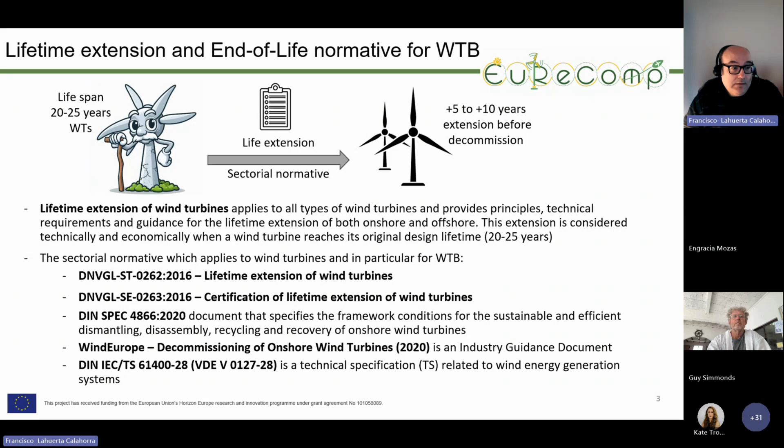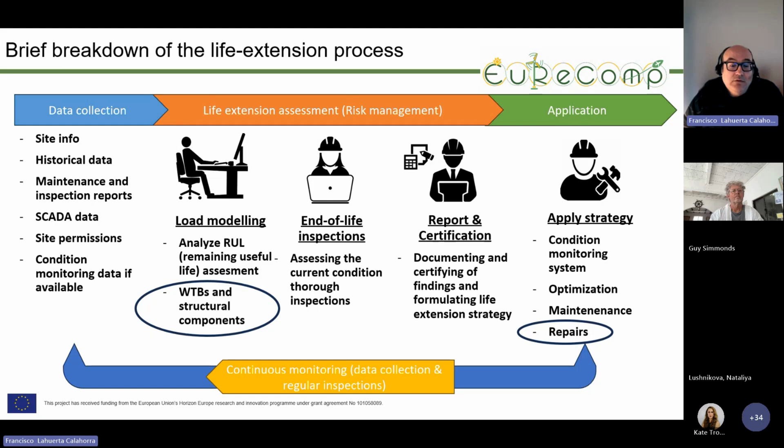Okay, we will continue. Moreover, the report and the certification are required, documenting and certifying all these findings and implementations applied to the condition monitoring techniques, the optimization of the fleet of wind turbines, the maintenance, and the necessary repairs that might be needed. When wind turbine blade life is extended, closing the loop requires continuous monitoring and data collection to assess the ongoing process and verify all this data. In the project, we have only focused on the repair parts and on assessing the structural component of the wind turbine blade by analyzing the residual useful life, which is work that is ongoing at this moment.

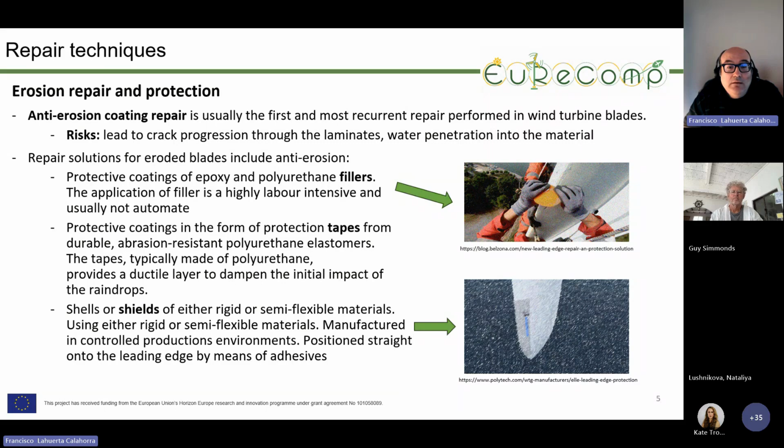In relation with the repair techniques shown in this slide, there are repair techniques related with the protection and erosion of the wind turbine blades. These repair techniques are related with the use of filler or coating tapes outboard of the wind turbine blade, where the highest speed of the wind turbine can be found. Moreover, wind turbine blades might be equipped with metallic shields or shields manufactured of composite materials outboard at the tip, where you might find the highest tip speeds.

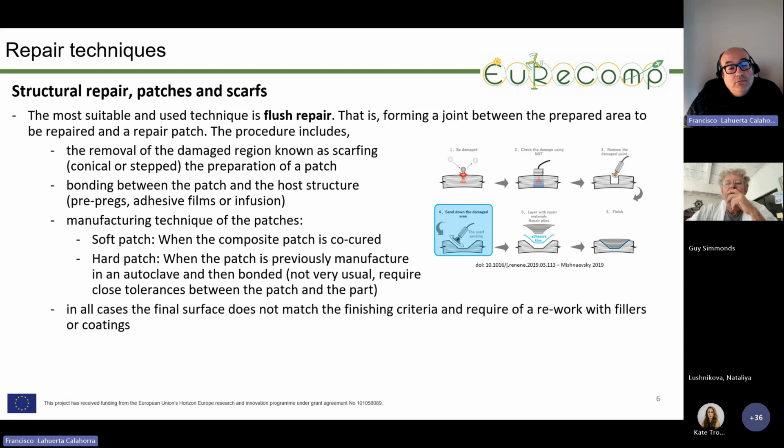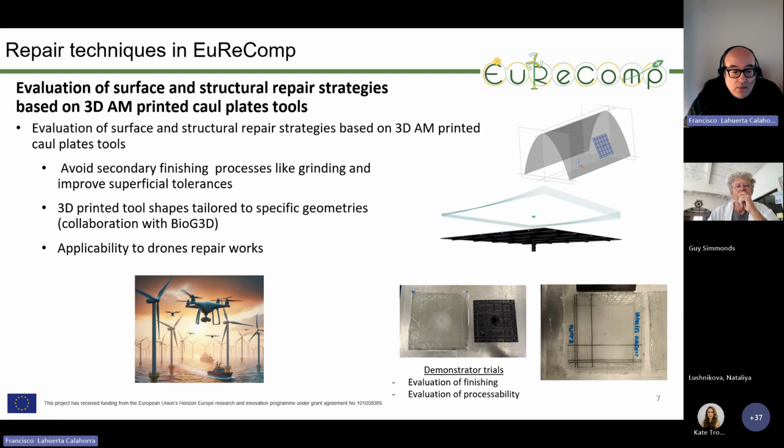Potentially, it's possible to use 3D printed parts tailored for the warping surface that you normally find in wind turbine blades, with relatively good geometrical tolerances, and this can be applied to repairs performed by drones, because it can avoid the use of the vacuum bag and all the vacuum procedure. At this moment, some demonstration trials with the 3D printed caul plates have been carried out, where good surface tolerances are possible, and it's possible to produce trial patches.

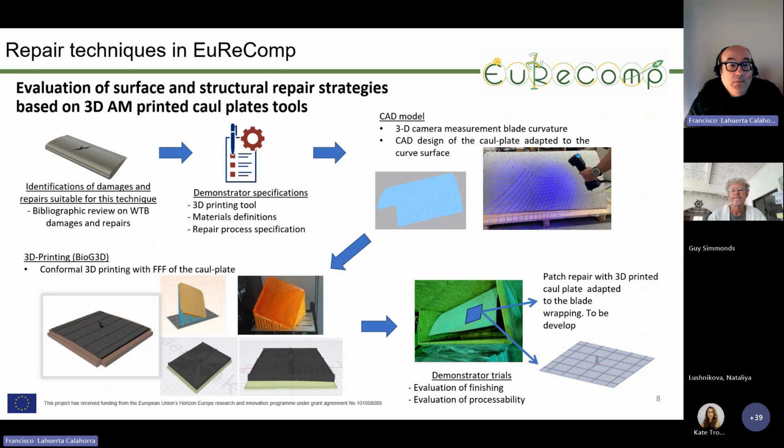We also need to obtain the CAD model of the surface, which can be carried out with a 3D camera. Later, with all this information and the CAD, the caul plate can be 3D printed, which is carried out by BioG3D, and later with the caul plate we can apply the patches in a final consolidation process with a thermal blanket or some infusion. And so, here it ends.

And what to do when life extension is not possible? Well, this is something that will be explained by our colleague Andreia Araujo.

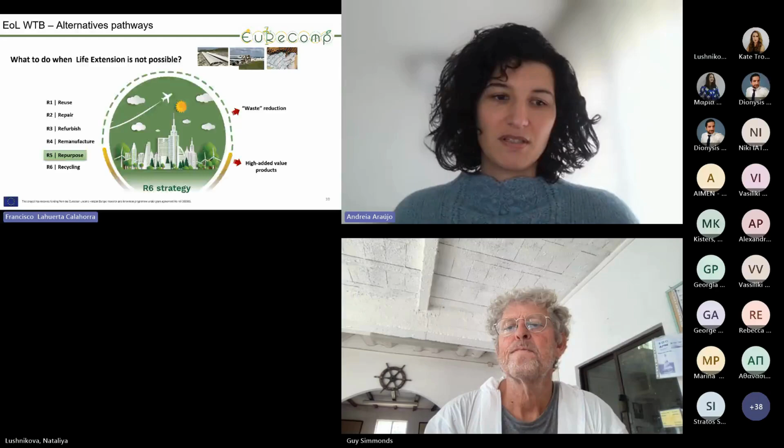So should I stop sharing? Yeah. Okay. Yes, please. Thank you, Francisco. I will start sharing my screen now, and I will continue with this presentation. Are you seeing it in presentation mode? Yes. In full screen? Yeah, awesome. Yes.

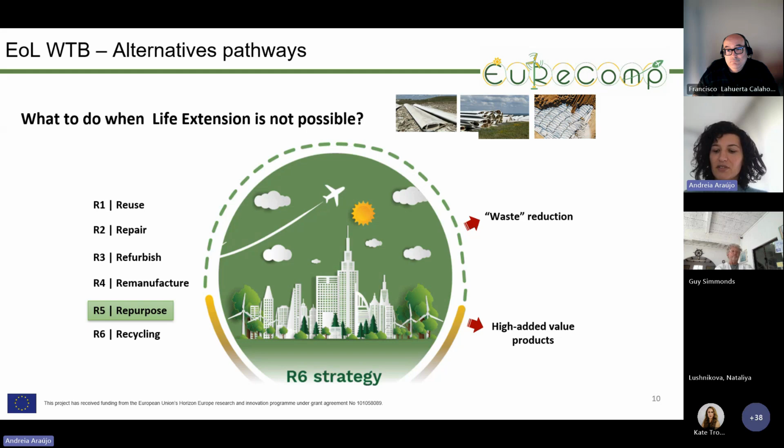So as Francisco mentioned, our goal at INEGI, in collaboration with other partners, is to look into other strategies. In this case, what to do when life extension is not possible, and more specifically, how we can repurpose end-of-life wind turbine blades to make sure we are not contributing to a huge amount of waste just left on our continent. There are several study cases, or implemented cases, where end-of-life wind turbine blades have been redesigned for a new application.

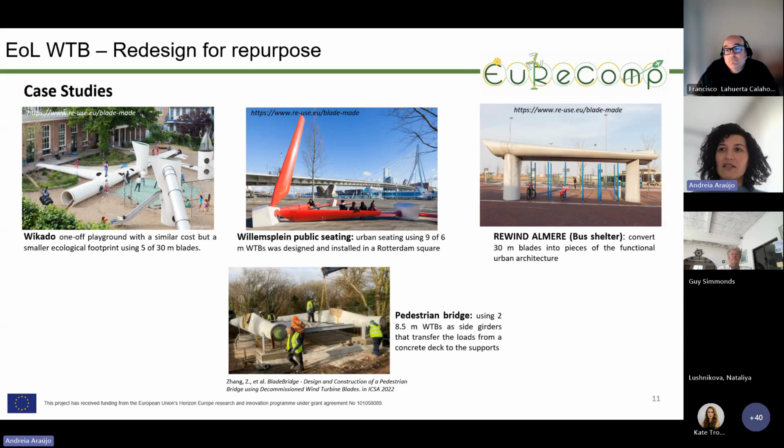We can start with the Wikado playground, where five 30-meter-long blades were cut and used as a safe place for children to play. The second case study is the Willemsplein public seating, in a square in Rotterdam, where they used nine 6-meter-long wind turbine blades to make public seating. On the right side, we have a bus shelter converted from three pieces of a 30-meter-long blade. And on the bottom, we have a pedestrian bridge where two 8.5-meter-long blades were used as the side girders for a bridge.

Last but not least, we also have a different case study. This is a conceptual architectural housing thought for underdeveloped countries, where different sections and different parts of the end-of-life blades could be used for the construction of houses. So straight panels could be used as doors, window shutters, panels, facades. The top and bottom airfoils of the blades could be used as the roof frames for the houses,

and other curved parts also for the roof. And a root section of the blade could be used as an elevated foundation for the house, for instance, to prevent damages during floodings.

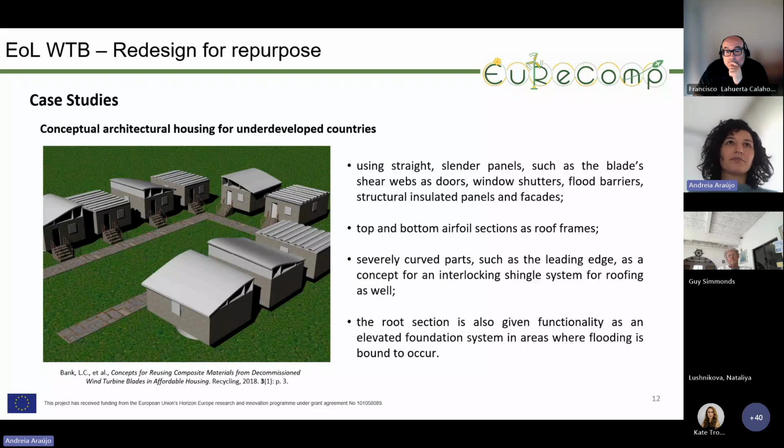These are some case studies that we can find easily on the internet, but there are many more, and there's increasing interest in this route of strategies. In the EuReComp project, we did an extensive search, and we kind of divided the approaches into 4 areas.

The first one was on ideas on how to use a complete wind turbine blade for high-loaded applications. The second was again how to use a complete blade, but for low-loaded structures. Then the third approach was high-loaded segmented structures, and the fourth, low-loaded segmented structures. On the right, there are some images of the case studies presented in the previous slides,

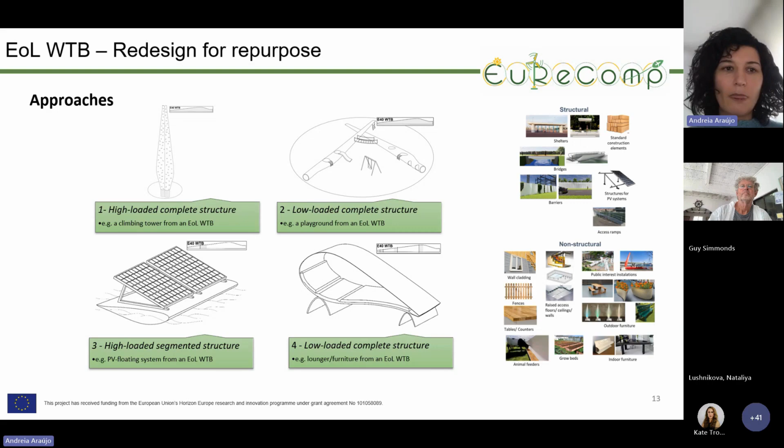and others that were not. And based on this search, we ended up with the idea of a repurposed demonstrator to be developed during this project, which was a floating PV structure. And we started in collaboration with HTWK to design and develop a small-scale demo case. This would support one PV panel.

And the idea for this first approach was to have an initial proof of concept for the final application, develop a methodology for closing the ends of the wind turbine blade segment, because of course, if we want this to float, we have to make sure no water enters the structure and weighs it down. Of course, evaluate the floatability of the demo, and then other features.

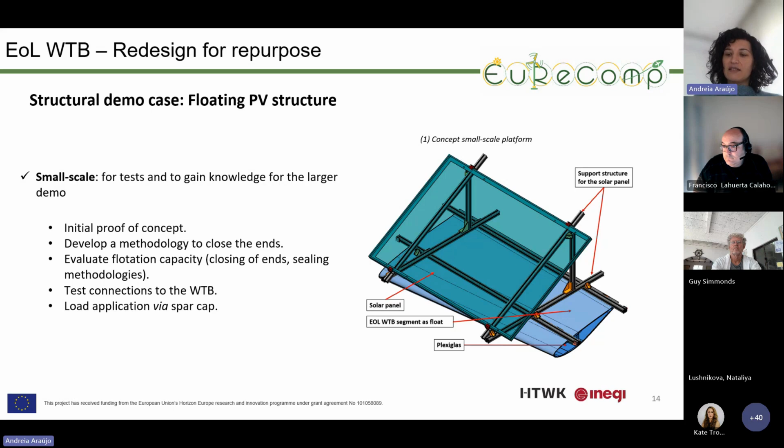I wanted to point out that in this small-scale demo, there was the use of aluminum profiles as the supporting structure for the solar panels. And I can tell you that this demo case was successfully constructed by HTWK, and here is an image of the demo floating in the water. So, a successful approach for this demo case.

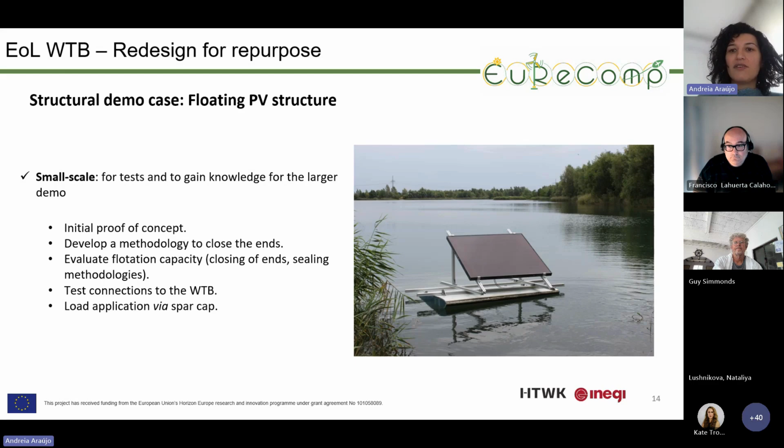With this in mind, we started developing the large-scale demo. Here, we decided to use 2 segments of wind turbine blades with bigger dimensions to make sure we could add more PV panels. In this case, we thought 4 was a good idea, and in this way, we could manage to have a big enough demonstrator, but not too big that it couldn't be produced and transported by us.

In this case, to make sure we were further increasing the repurposing and reusing of different parts of the wind turbine blades, we decided to replace the aluminum profiles by glass fiber reinforced polymer beams from the spar caps of the wind turbine blades also. And this way we could make sure that at least most of the components of this demo came from end-of-life materials.

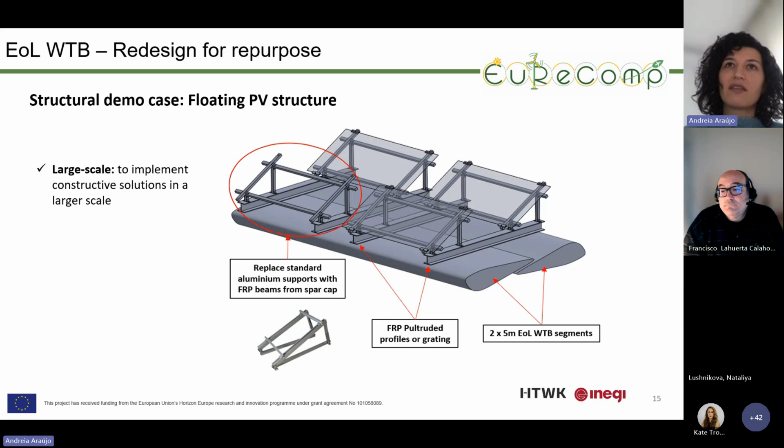And afterwards, we managed to find the right sections, thanks to a Portuguese wind turbine blade dismantler called Ventos Metódicos. And with their support, we cut it. We obtained 3 10-meter long wind turbine blade sections, all from the same wind turbine, all with the same size. From the 10-meter long sections, we fully studied one. We managed to recover all the accurate dimensions and so on from that.

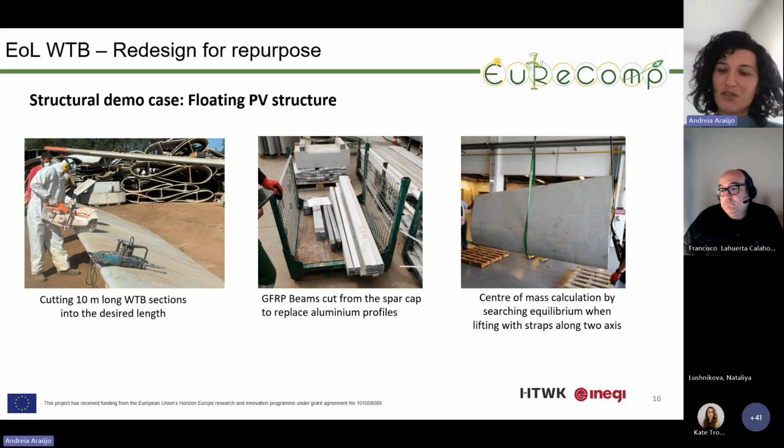And we used all that information to design and develop our demo case. We also cut the GFRP beams from the spar caps to be used as a supporting structure for the final PV panels. And then we did all the necessary work to calculate the center of mass, to make estimations on floatability, and decide on how to combine all the different elements of this demonstrator. And here's just a GIF representation of how we decided to construct the demo.

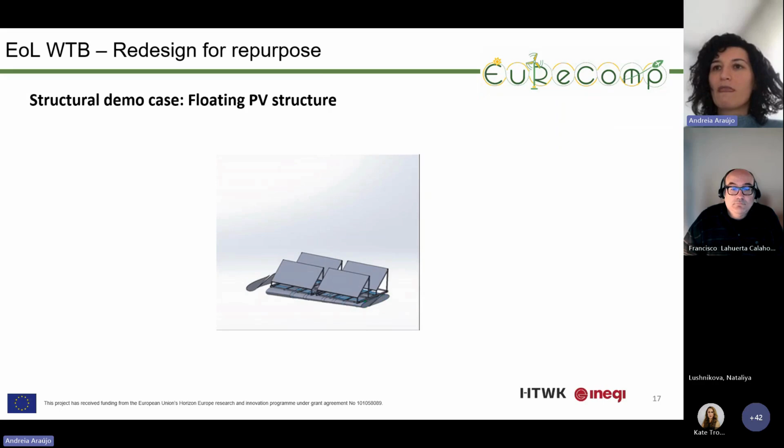And at the moment, this demo is under construction.